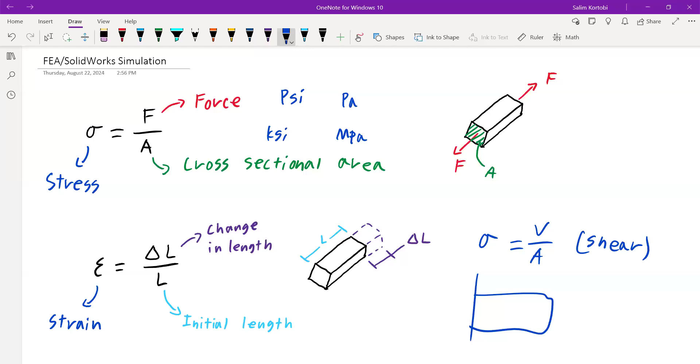For shear stress, a lot of times you'll see people write sigma equals F over A, or sometimes sigma equals V over A, capital V, where V is the shear force. So you might see it written this way for shear. But again, if you have a member like this and a force applying that's trying to shear it off something.

So another really important topic is strain. Again, this is one of the first things you learn in strength of materials. Strain is pretty much a representation of how much a body has deformed relative to its initial length.

So let's say we have this member, and you apply forces to it - it's going to elongate some amount. To calculate the strain, you take the initial length L, and the change in length, which is how much longer the material got, and divide that by the initial length, and it gives you the strain.

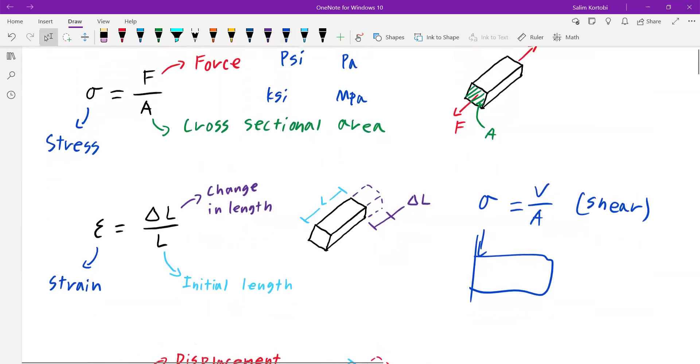That's a measure of what sometimes people call percent elongation, which can be derived from strain. Stress and strain are kind of related - I'll go into that a little bit later.

But a lot of times when you're designing or analyzing things, you don't really care about strain as much as you care about displacement. This formula here is pretty much the same as the strain one, except I switched L to X. X is usually what people represent as displacement. So displacement is delta X - pretty much how much this body has deformed.

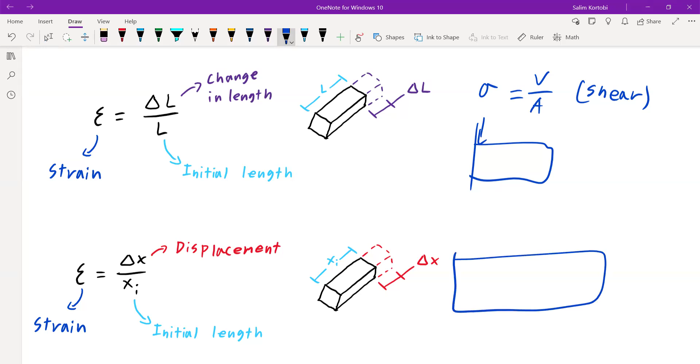When you're looking at deformation, you don't really care about the initial length. You just want to figure out, if I have this beam over my head, and I need a certain clearance to drive a machine through - if I have a thinner beam like this, and you put a big weight over it, that beam is eventually going to deflect to something like this.

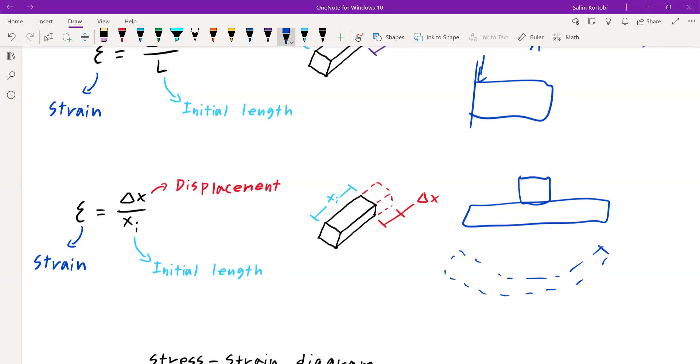Again, my drawing is not the best. So if you need to drive something underneath here, and you have a certain ceiling height, you may want to know how far this deflects. Because if it deflects, let's say, 3 feet, and you have 8-foot ceilings or something, you might end up with a clearance issue.

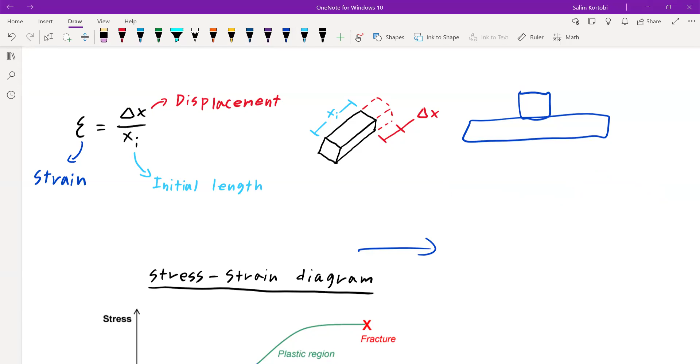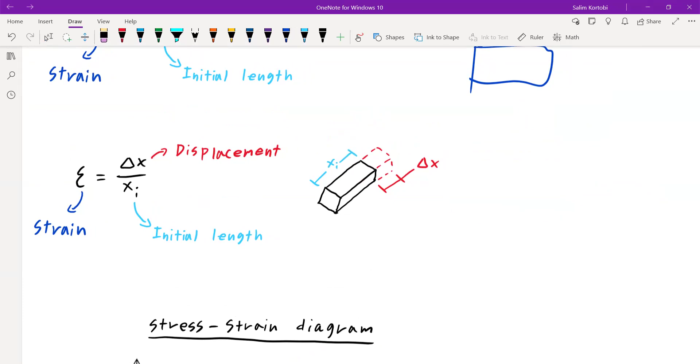So most times when you're designing stuff, you actually care more about displacement than strain. But displacement can be calculated from strain, and vice versa. The symbol for strain is the Greek letter epsilon - that's typically what you'll see for strain. This is normal strain, what I'm showing here, but there are other formulas for shear strain as well. I'm just trying to hit the high topics here.

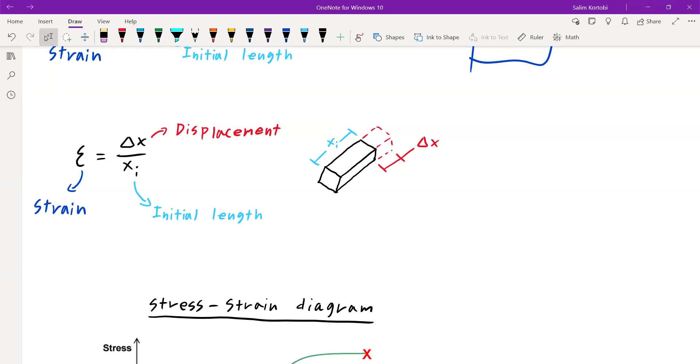I don't want to completely do an entire strength of materials class here. So these both go into - actually, before I go any further, does anybody have any questions about stress or strain or displacement?

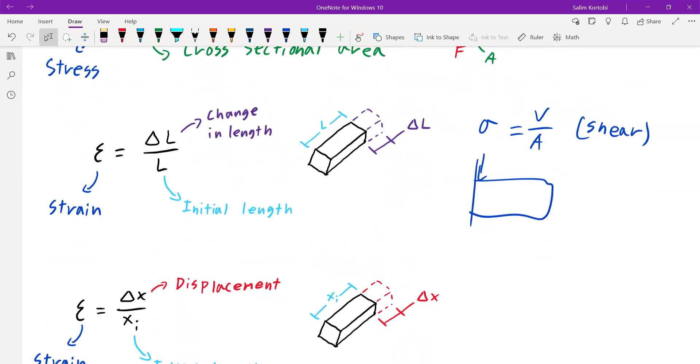So these are pretty much related, and in strength of materials, you probably spend a lot of time, or if you haven't taken it, you will spend a lot of time dealing with stress strain diagrams. So this is a stress strain diagram. I kind of like this diagram, it's a little bit simple. I actually found it from this research paper here.

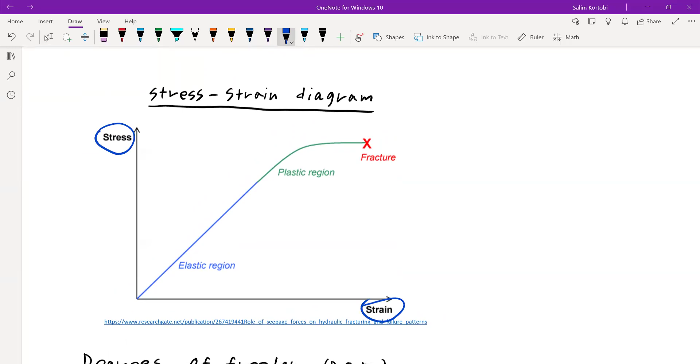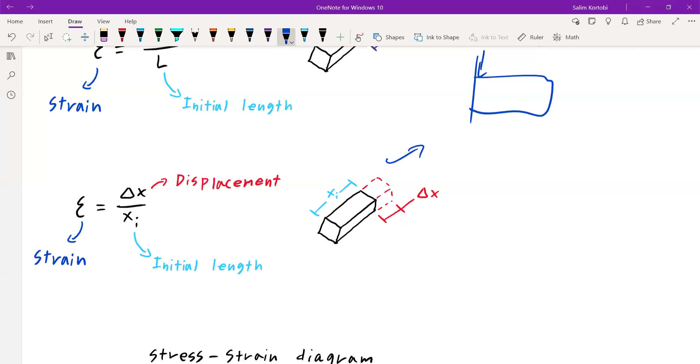When you're looking at a stress strain diagram, you're plotting on a graph the stress versus the strain. You've got strain on the x-axis and stress on the y-axis. As stress increases, the material is going to deform, so it's going to get longer and longer. The stress will keep going up until eventually it'll fracture, that's when the material will actually break.

But a region we're very interested in, especially in engineering, is this region right here. This is known as the linear elastic region, which means if you have a steel bar within this region, it pretty much acts as a spring. It acts as a very stiff spring, but you apply a force and it's going to elongate proportionally to the force applied.

So if you apply 100 pounds to a steel bar, let's say it expands by a thousandth of an inch. If you apply a 200-pound load, it should deform by two thousandths of an inch.

So it's linear. Also in the linear region, if you get the stress up to, let's say, here, and then relieve whatever force you're applying, that displacement will go all the way back to zero, so you won't really tell that anything has happened to that part.

Something actually changes though when you go above this point right here. This is what's called the yield point. That's when a material will actually yield, which means it's permanently deformed.

So what'll end up happening is if you put enough stress to get it up to maybe here, the material will go back some amount, but it'll end up here. So there's going to be some permanent deformation that you can't really get rid of by unapplying the force, if that makes sense. Again, this is probably pretty familiar from strength of materials, but as a good review.

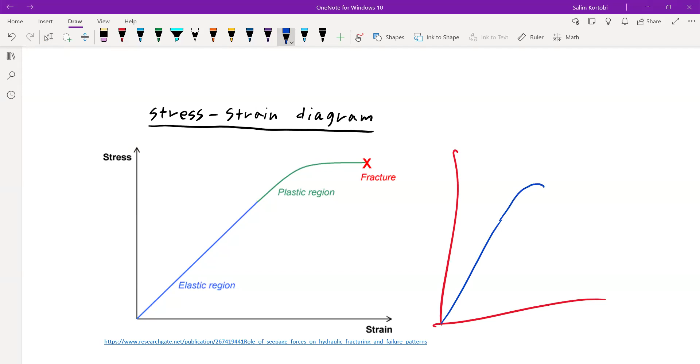If I draw another diagram with an offset, usually you'll have the linear elastic region, then it'll go into the plastic region after it's yielded. It might get up to a peak, then come down, and fail somewhere over here. There are some different regions in there.

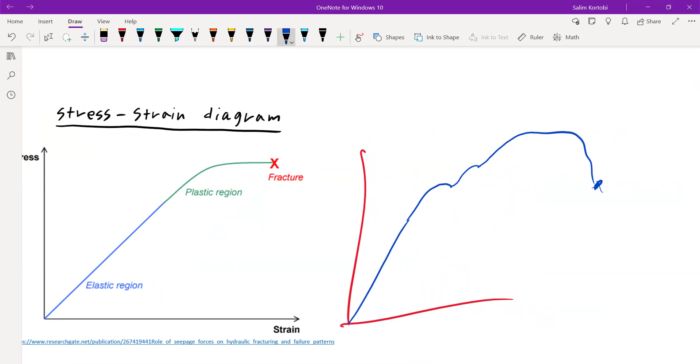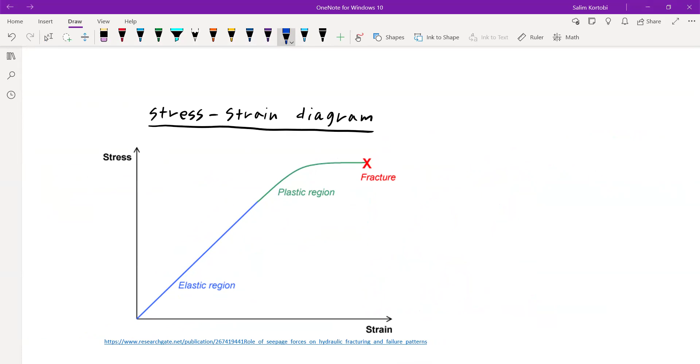You learn a lot of this in strength of materials or machine design. A lot of these things are good to know, but not 100% necessary to know how to run simulations. The elastic region though, and making sure the material we're working with is elastic, is a big one. If you're trying to analyze a material that's not elastic or has exceeded the yield stress, your results are not going to be accurate.

Okay, moving on. So degrees of freedom of a system. Well, actually, let's say a rigid body. So typically, if you have a body, let me try to sketch it out.

If you have a body, you've probably heard that there's 6 degrees of freedom, meaning that body can move in 3 directions: it can move in the X direction, the Y direction, and the Z direction, which would be in and out of the page. So those are the 3 translations. You also have 3 rotations: it can rotate about the Z axis, the Y axis, and the X axis. So those are your 6 degrees of freedom.

If you have a system made up of several links, each one could potentially have 6 degrees of freedom. Some of them may be restrained, but these are some of the things you have to look at when getting into simulation.

One thing I'll mention is a lot of what I'm going to get into now is specifically about SolidWorks simulation. Other FEA packages or simulation packages may be slightly different, so don't assume all of this applies to another simulation package. Most things like degrees of freedom are not really simulation specific, that's just more of a physical phenomenon.

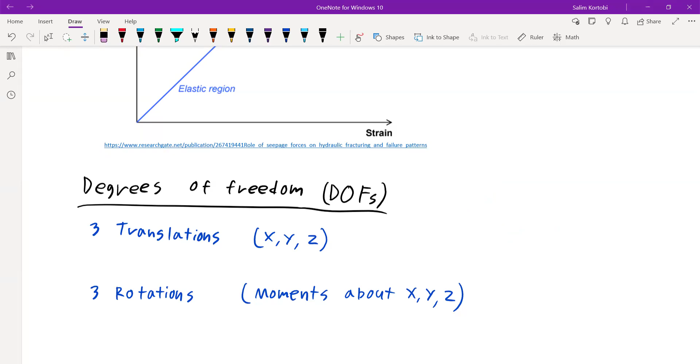So any questions about degrees of freedom? Okay.

This is kind of just a review from statics. Most of you probably already know this, but for some people who haven't taken statics or strength of materials, this will be a bit of an overview of some simple things that will help.

So for 2D, the fixed constraint limits all degrees of freedom. You're limiting a moment, limiting translation in the X direction, and limiting translation in the Y direction. For 3D, you're limiting all 3 translations, X, Y, and Z, and all 3 rotations: rotation about X, rotation about Y, rotation about Z, or moment about X, moment about Y, and moment about Z.

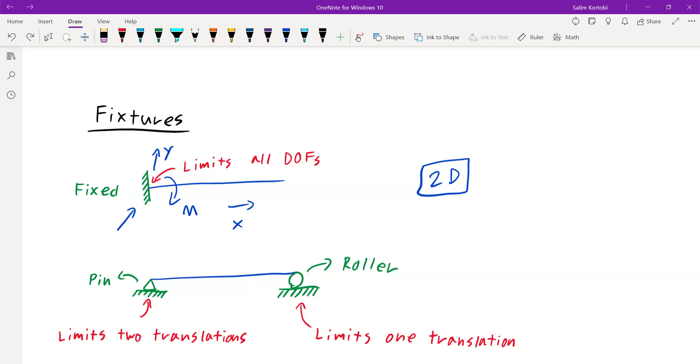It's going to be a little tricky for me to show 3D here, but when we get into SolidWorks simulation, probably the next session, I'll show exactly what we're looking at in 3D, because most of the things we're going to be analyzing is actually going to be useful when we're looking at 3D systems.

So the next one is going to be a pin constraint, shown here, usually drawn as a triangle shape. Sometimes you'll see it look like it's fixed on the bottom, but really the constraint we're looking at is the pin.

If you think of, let's say, you have a member like this, and you have a pin going through this hole here, this member can't move up. It can't move along the X or along the Y. It can only rotate about that pin. This is in 2D, and 3D is similar.

So this limits the two translations. This piece cannot move in the X, and it cannot move in the Y because it's a pin, and that's how you would show that. You'll see that a lot in strength of materials and statics.

A roller constraint will limit one translation. Think about having a wheel that's on the ground. Whatever is supported by the wheel is not going to be able to go into the ground, so it's preventing this member from hitting the ground. There'd be no translation in the Y, but it's free to move in the X, and it's also free to rotate, so the moment here is also unrestrained.

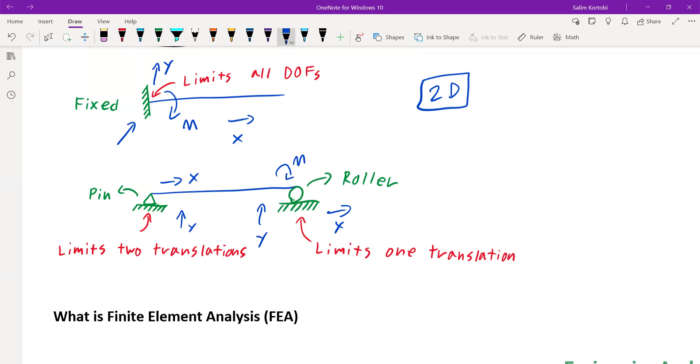Again, those are the simple ones. In simulation, pretty much all of the fixtures that we're going to be dealing with are going to be 3D fixtures or some variety of them, so I'll definitely talk about that more later.

Okay, so any questions about fixtures before I get into what is finite element analysis?

So what you'll do is analyze the forces, analyze how each one of these is deforming - how is it moving, how is it deflecting. And when it figures that out about all these different elements...

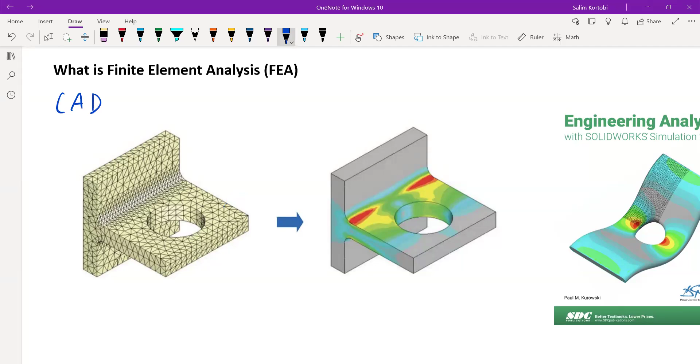You'll also hear some people call this - you're probably all familiar with the term CAD, computer aided design. Usually what happens is CAD will go to what's called CAE, which means computer aided engineering, which is pretty much analysis like this, FEA type of stuff.

Then what usually happens after that is when you want to actually fabricate your part, you'll put it into what's called CAM, computer aided manufacturing. For mechanical engineers, depending where you're working, you may or may not deal with CAM at all - they don't teach that in the mechanical engineering degree, but METs do teach CAM because they do a lot of machining work. So that's the process - typically in the design process it goes from CAD to CAE, then it may go back to CAD.

You make a modification, then it goes back to CAE, or simulation, and then you keep going round and round until you get a part you're actually happy with. You can change the material, make sure you have the right material, make sure you're getting the stress you want, and stuff like that. Any questions about FEA in general or anything I've just talked about?

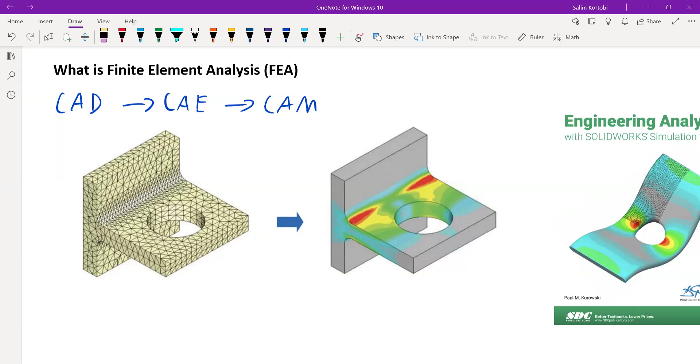Okay, so next I'm going to talk a little bit about elements. There are different types of elements. These that we looked at earlier are what are called solid elements.

A solid element looks something like this - it's what's called a tetrahedron. So it has four faces: one face, two faces, three faces in the back, and then a face at the bottom. It's pretty much a triangular pyramid with a triangular base.

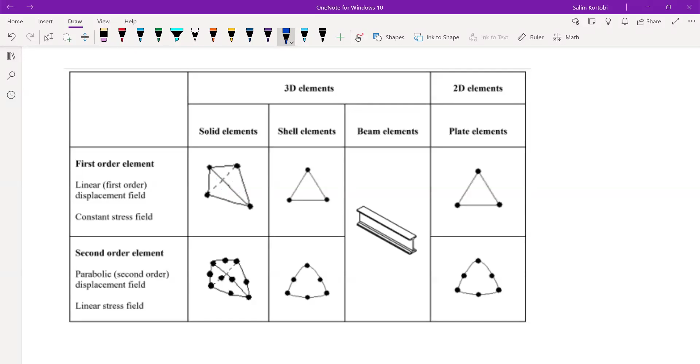That's usually used for parts that are relatively thick, kind of like this. You can see that you can fit quite a few elements in there. There are also something called shell elements, which are kind of a 2D element.

It's technically still 3D because it can deflect in 3 dimensions, but geometrically, when you start out, it is just a triangle. So typically what that'll do is if you have a very thin part, like this, and you're applying, let's say, maybe a thin sheet metal something, and you're applying a force.

What you can do is treat this as a shell, and have all these little triangles treat all of the sides as little triangles instead of solid elements.

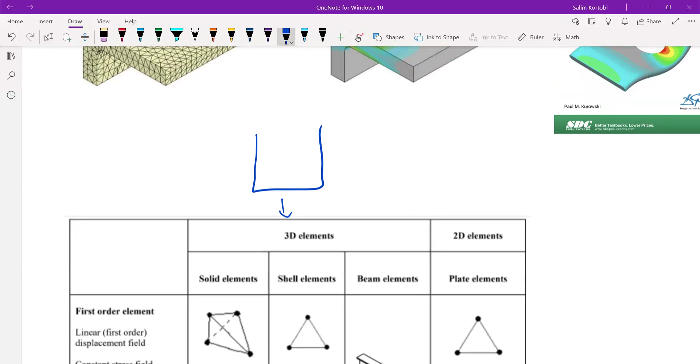The reason for this is a lot of times the more elements you have in a model will dramatically increase the time it takes to actually run the analysis. So shell elements typically are a way to simplify. It may not be as accurate as a very fine solid element, but it saves a lot of time, and usually the accuracy is close enough for most applications.

So it's worth having the time savings and also the computational resource savings to not have to run a simulation for, I don't know, 10 hours to get an answer that's within maybe 5% or 3% of when you're using shell elements, which might take an hour instead. Again, those numbers are just off the top of my head - it depends on the part, and on a lot of different factors.

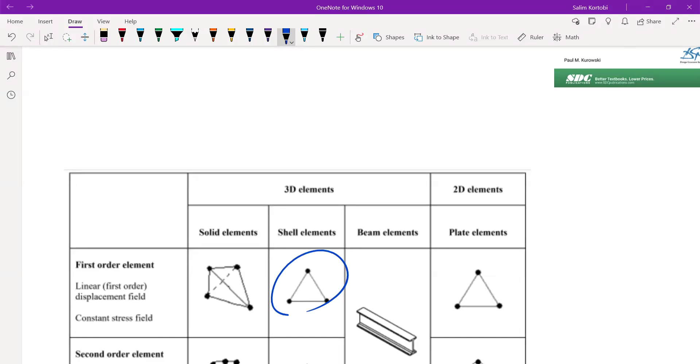Another type of element is what's known as beam elements, something like this. A beam element is pretty much when you have a beam that has a constant cross section, kind of like this I-beam.

What you can actually do with a beam element is, again, in research here, we're probably not going to - we may or may not use beam elements. I'm thinking we probably won't, but if we do, I can definitely go into more depth on those at a later date.

But pretty much a beam element is treated kind of like a line, and you have usually a node on each end, and in some cases also a node in the middle, depending on the order of the element and stuff like that.

So when you're dealing with beam elements, it's kind of like calculating forces on a line, and then simulation will actually go back in and do the I-beam cross section after the fact, kind of. I wouldn't say after the fact - it's all part of the analysis, but you don't really see the actual cross section, though it is accounted for in simulation.

So it's another way to simplify instead of having to use a ton of very fine solid elements or a lot of them. When you have a constant cross section, a beam element is another way to simplify elements, and simplify the calculations that you need to do.

There are 2D elements as well. You can also run just 2D simulations, which are a lot more simple than 3D. Typically these are used in very specific cases where you only have forces in two directions, versus if you have a component or structure that's deforming in three different directions, or in 3D.

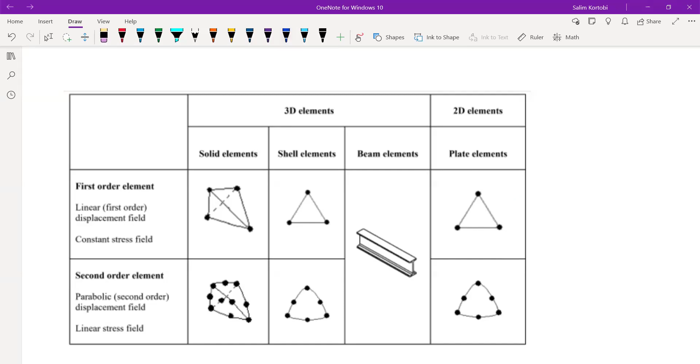So again, we probably won't deal with a lot of this either, but just so you know it exists. One thing in SolidWorks that you definitely want to know: there is a distinction between first order elements and second order elements.

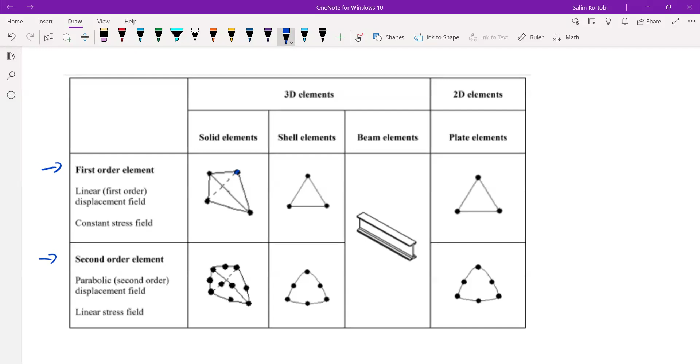Pretty much what that means is for solid elements, a first order element has a node at each corner. So node here, node here, node here. A regular tetrahedral solid element will have 4 nodes, one at each corner.

What happens if you go to a second order element? It's still a tetrahedral element, but not only do you have 4 nodes, one at each corner, you also have a node in the middle of each segment. This allows the model to not only figure out the displacement and properties at each corner, but this line here can also now deflect, and you'll end up with a parabolic kind of displacement. This is a lot more accurate than the first order version.

In SolidWorks specifically, you sometimes won't actually see the term first order and second order element. What you will see is something called draft quality. Draft quality designates a first order element, and high quality designates a second order element.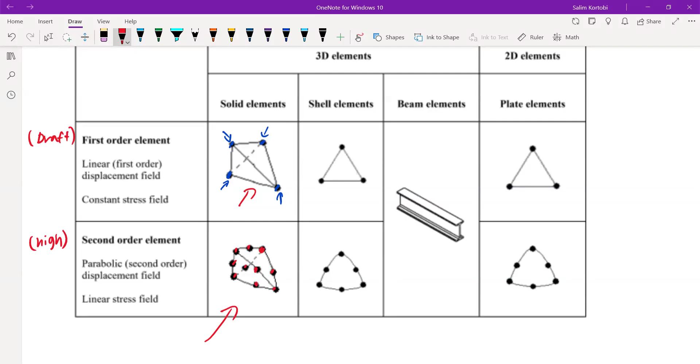Typically, you always want to use second order elements. You don't want to use first order elements unless you're just trying to check something. The exception is, let's say you put all your fixtures and forces in place, and you're just trying to figure out how the actual body behaves. So let's say you've got a rod.

Let's say you have a rod in tension. It's fixed on this face, and you're pulling on it there, and you want to see does this actually behave the way I think? Obviously it should extend, something like that. So draft quality is good for that. You don't really care what the exact results are, you're just trying to see if the deformation, the behavior of this model, is actually what you're expecting.

Sometimes you can use draft quality because it saves time just to see, okay, am I getting the behavior I'm expecting? If you are, you can go back and switch it to high quality. If you're not, you have to go back and look at your fixtures and forces to make sure everything is set up properly, or you might have to change some things. But when you're actually doing calculations or simulations, not just checking your setup, you definitely want to use high quality, or second order elements.

Similar thing here for shell elements, a node at each corner. Again, you have a node at each corner and a node at the midpoint of each line, and these can actually deflect in a parabolic deflection. Some of this also applies to beam elements and 2D elements as well.

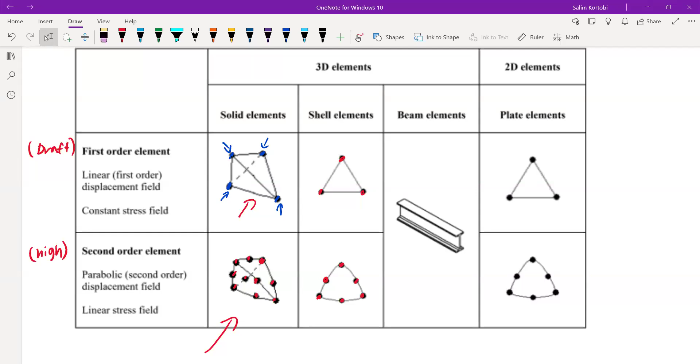Again, a lot of this stuff you won't necessarily see when you're in simulation, but you obviously want to know what you're dealing with, because if you're running all of your things as draft quality, your results are probably not going to be that accurate, although you won't really be able to tell unless you actually look closely. Then all of a sudden, maybe somebody else runs a simulation and they're getting very different values from what you're getting, enough different that there's cause for concern. That's definitely something you want to have in the back of your head while actually setting up and running simulations.

I will talk here a little bit about the difference. All of you are probably familiar with CAD and some things.

You may or may not be familiar with SolidWorks, but CAD typically functions similarly between packages. When you design a part, as long as you get the desired thing, the right shape, the right sizes or dimensions, that's pretty much all you really care about. That's pretty much your goal in CAD: to get a design that looks like what you want it to.

So for simulation, or FEA in general, it's not as straightforward. When you're designing a part, you don't necessarily care exactly how SolidWorks is doing a revolve feature, all the calculus and math that goes on behind it. Some people do, and it's great to know how it works, but beyond curiosity, it doesn't impact your job as a designer to know it's using this partial differential equation or some topic from calculus 3 or 4.

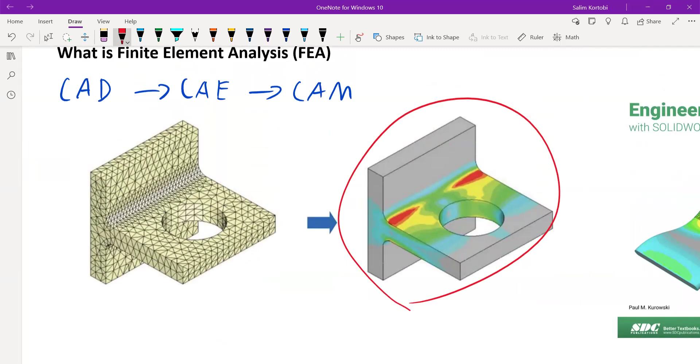It'll usually have a plot that looks something similar to this. I'm going to have some examples at the end so you can see exactly what the interface in SolidWorks actually looks like - it's like this but a little different, this is more of a simplified version. It's going to give you this nice pretty picture with all the colors and everything.

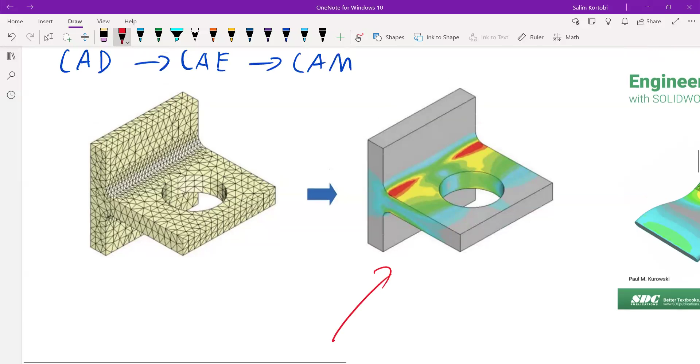The tricky part of simulation is that, unless it errors out for some reason - which can happen, usually because you didn't set it up right, and at least then there's a problem - a lot of times you'll get this output, and the engineering part is making sure the picture it gives you is actually representative of what you're dealing with in real life. Just because this nice pretty picture shows up on the computer doesn't necessarily mean the actual part is even set up correctly. You might have different fixtures or different conditions in real life than what you put into SolidWorks, and it's still going to give you an output.

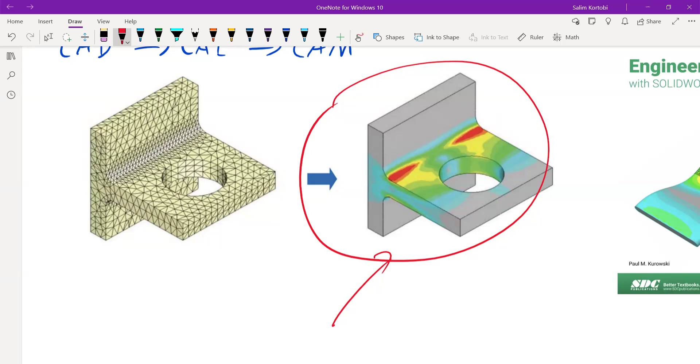So it's pretty much like on an exam: you put your long formula into your calculator, and say you forget and instead of putting in 355x, you put in 55x. Obviously your answer is not going to be anywhere close to the actual correct answer.

That's why with simulation, it's very important to know at least a basic understanding of what happens on the back end, what elements are, and things like that. That's a lot more important than with CAD, where if you get the part with the right shape, you're kind of happy. With simulation, you not only want it to look nice and have the correct parameters, but you also want to make sure the results are actually accurate, because that's literally the whole point of simulation - to predict real life behavior of parts.

So if you're not getting an accurate prediction, simulation is really not helping you very much.

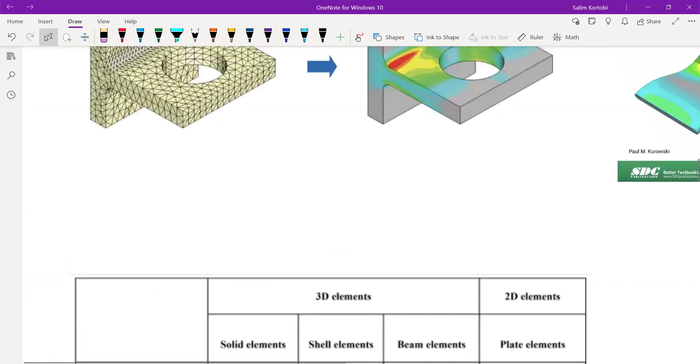One thing I'll talk about with solid elements: when you look at a thing, one thing you'll look at is how many elements are across, across the thickness, some people will call this. So if you look here, there's actually 3 elements. There's 1, I'll try to put these in different colors. There's 2, and there's 3. There's 3 different elements across.

For solid elements, you typically want a minimum of at least 2 elements across the thickness. Ideally, you usually want 4 to 5 if you can. So element size, you can obviously shrink the element size if you need more elements across. Again, what will end up happening is that's going to make a lot more elements, and it's going to make your simulation longer. But you do want to have a reasonably accurate simulation.

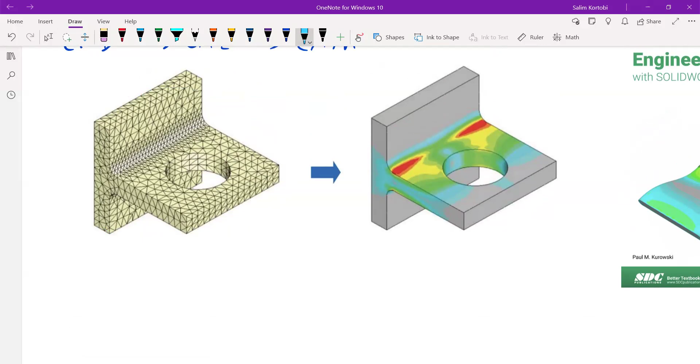Another method you'll sometimes see people use, a bit off topic here, is they'll run a simulation with a more coarse mesh, something like this, and then they'll run another one with a very fine mesh, with a lot more elements. They're trying to get an idea: is this even in the ballpark, or is this part just going to automatically fail? And if they're getting numbers they're happy with, they'll run something a lot finer and say, let's really look at this and get a much higher level of accuracy. Because the more elements you have generally means you get a lot more accurate prediction, especially when you're dealing with regions that are curved.

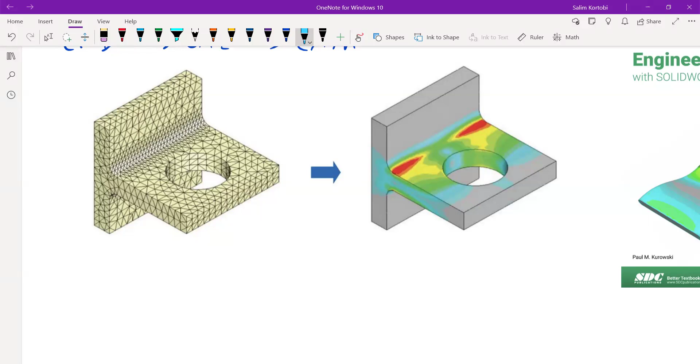You can see some mesh types are different - there are different ways to mesh in SolidWorks, not just elements. There are things called curvature-based meshes. When you have a curved surface, it'll try to make a finer mesh on that surface, or along that curve or fillet. So when you have features that are changing rapidly, you definitely want to try to get a finer mesh in there.

Any questions about anything so far?

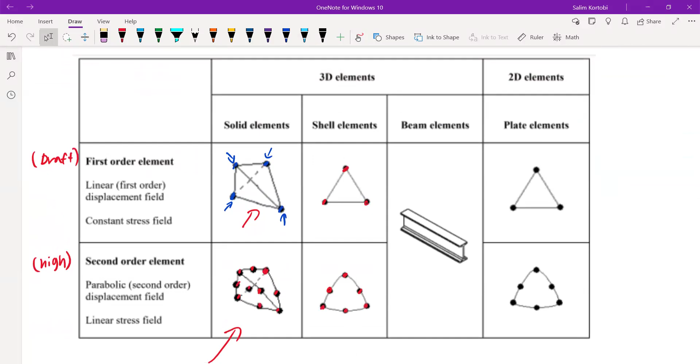Okay, so moving on, failure theories. If you've taken machine design, you're probably familiar with at least a couple of these. Again, it's not really important to know exactly how these are calculated - you can look these up, and there are formulas for how they're all calculated.

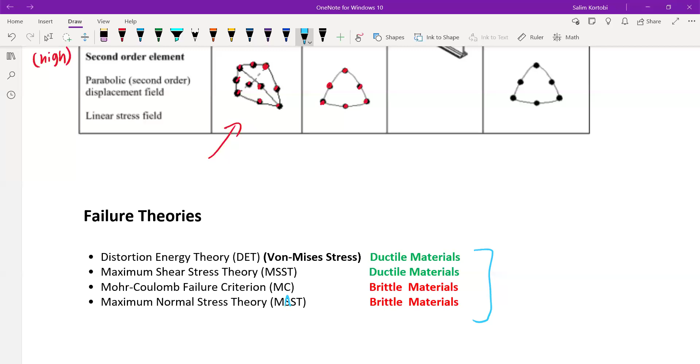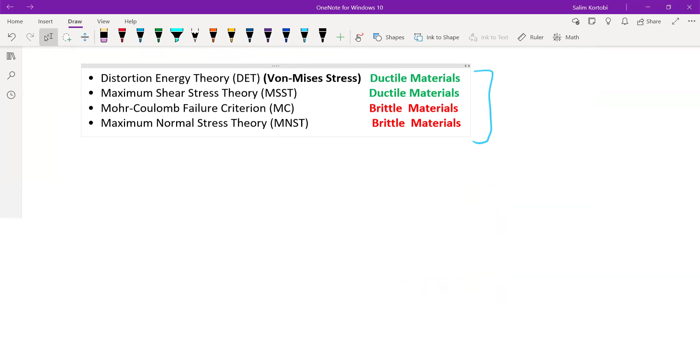SolidWorks predominantly uses four failure theories, not necessarily defaults, but these four: distortion energy theory, maximum shear stress theory, Mohr-Coulomb failure criterion, and maximum normal stress theory - this should be an N, that's a typo on my side, let me see if I can fix that. Sometimes you'll see different abbreviations as well - that should be MNST.

For anyone taking machine design, you're probably familiar with these two especially, or if you're a grad student who's taken applied engineering design, I think that's the class name. You probably know DET and MSST. DET is the same thing as von Mises stress, so in SolidWorks a lot of times you'll see von Mises stress, which is using DET - that's the more common term for it.

These two are meant for ductile materials, while Mohr-Coulomb and maximum normal stress are for brittle materials. Different materials, like if you're dealing with glass or something like that, that's not really a ductile material.

What I mean by ductile versus brittle - like we were talking about earlier, let me switch colors here. When you have a stress-strain curve, you're going to have that linear elastic portion, and then you're going to have a yield point, and then it'll do whatever else. A ductile material is going to have a designated yield point, so there's a point where it'll yield.

Brittle materials don't really have a yield point. They get to a certain point and then just break. It's not a slow failure, it's going to just snap, like a bolt. Some bolts are very hardened, so they're very strong, but they're not going to give any warning before they go. They just pop. So brittle materials and ductile materials behave in different ways.

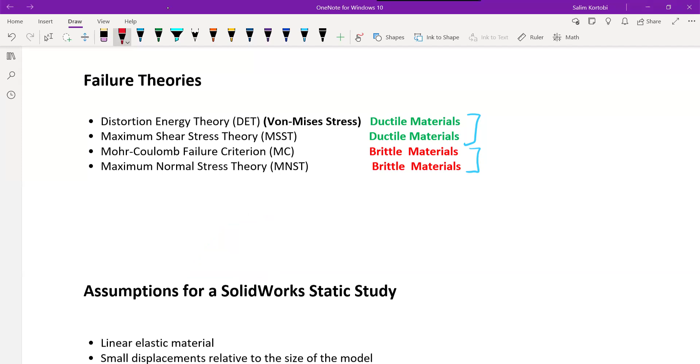Okay, so next, assumptions. What I'm going to start talking about is that in SolidWorks there are different types of studies you can run. A study is pretty much a setup, the simulation we're running.

The first and most common is a SolidWorks static study. From statics, you don't have any motion and such. I'm going to go through these assumptions because they're very important. This wasn't really taught in my CAE class, maybe different professors teach different things, but this is some of the stuff you need to know for the associate certification, CSWA-S for simulation, regarding the assumptions.

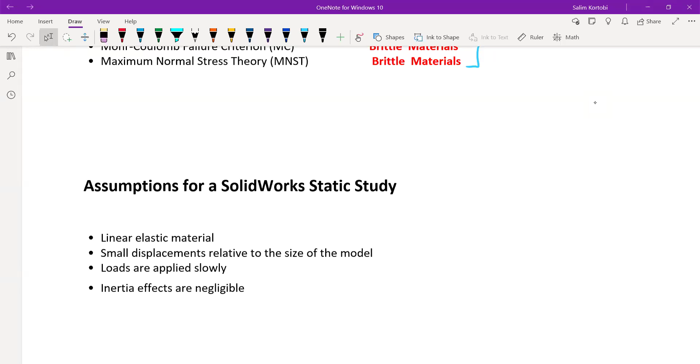Before I go into the assumptions for a static study, you have two general categories for studies: static on one end, and dynamic on the other. So from statics, or dynamics versus static - in static, the structure is not moving.

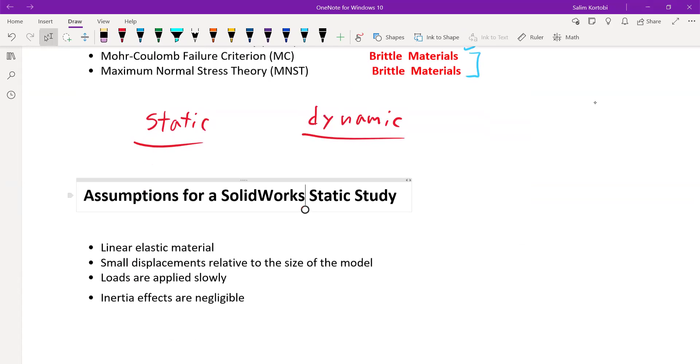You can assume that the sum of all forces is equal to zero. In statics, the big equation a lot of people use is sigma F equal to zero, and sigma M, the sum of moments, is equal to zero. Those are the big two for static.

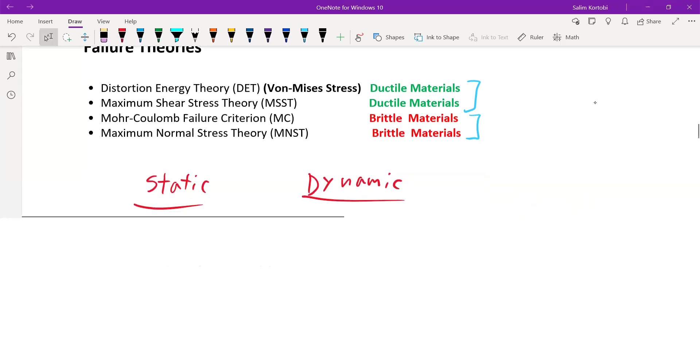For dynamic, it's not necessarily true that the sum of forces or sum of moments is equal to zero - the structure may be moving, like a car. So the forces may not necessarily sum to zero.

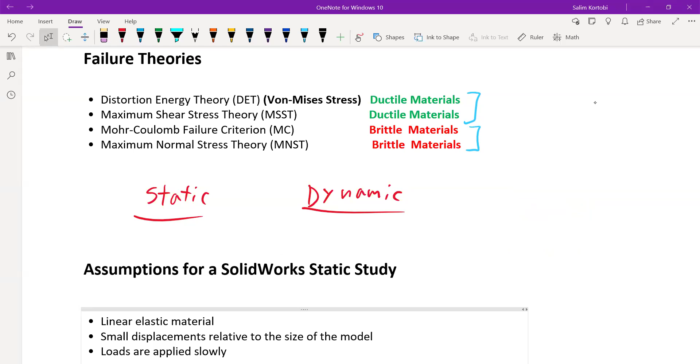There's a subcategory under static and dynamic - these are the main ones. Under both static and dynamic, you have what's called a linear study and a nonlinear study. This is the same for dynamic as well.

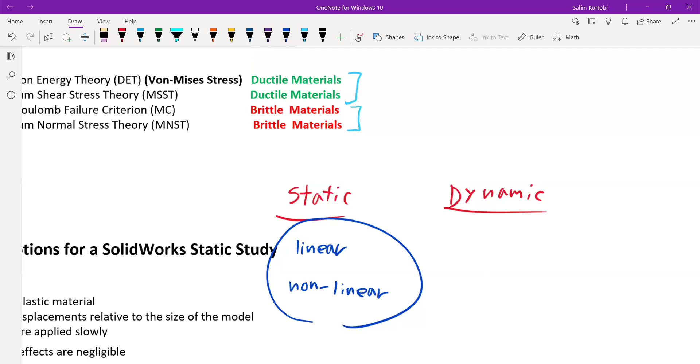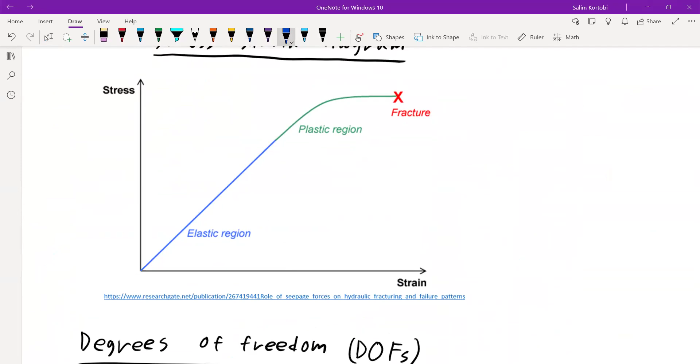So what does linear mean? We talked about this a little earlier - going back to the stress strain curve, you're assuming the material is elastic and behaving linearly, within that region. That's a big assumption. If you're dealing with a material that's not linear, or a linear elastic material that has exceeded yield strength, then it's now behaving non-linearly.

So you can't just assume that if you apply double the force, you'll have double the displacement - that assumption is no longer correct. The same thing happens for dynamic. Nonlinear adds an extra level of complexity.

There are different levels of SolidWorks simulation. The first is just SolidWorks Simulation, the standard one, which usually just does static studies - and when I say static, I mean regular static linear studies, not nonlinear. Then you can go up to SolidWorks Simulation Professional, which has some thermal capabilities, and a bit of dynamic simulations.

And then you have SolidWorks Simulation Premium, which again this is an overview, but you can go online and actually see all the comparison between the three. You'll end up with nonlinear type things - nonlinear dynamic, nonlinear static. Especially if you're in the workplace, simulation can be very pricey, especially simulation premium - it runs quite a bit of money.

So a lot of times people don't necessarily need premium if they're only running static studies for linear materials. That's one thing to keep in mind. Obviously for students, with our student edition, we have pretty much simulation premium, the student version of it. So we have the ability to run static, dynamic, or nonlinear of any variety, as well as thermal and a whole bunch of other stuff.

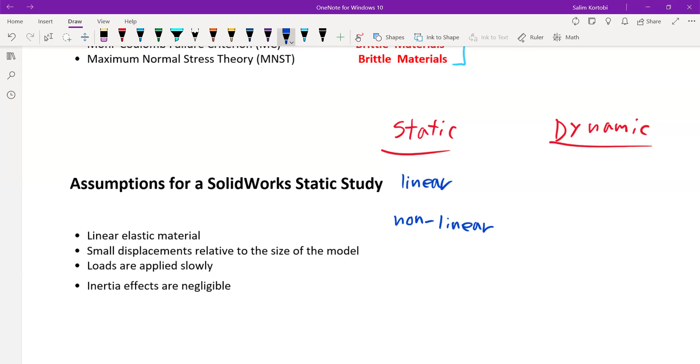Another one that's not necessarily as well taught is small displacements - meaning small displacements relative to the size of the model. So let's say if you have this huge I-beam that supports a bridge or something, and you apply your force and it deflects 0.0001 millimeters or something - that displacement relative to the size of the model is very, very small.

So that's another assumption. Let's say you have this tiny little pin put in some sort of hole, and you apply your forces, and assuming it stays linear and doesn't permanently deform, let's say this pin is 1 inch long, and it deflects - let's assume it stays linear, these numbers aren't realistic - let's say it deforms a quarter of an inch. So now you have a pin, and now it's like that type of thing.

And there are certain values - SolidWorks simulation will actually give you a warning if it thinks your displacements are too large relative to the model. A lot of times people get that message: 'We're detecting large displacements, do you want to run it?' Because there is a thing in SolidWorks simulation - you can do this in a static study - to treat it using a large displacement model versus a displacement model that's meant more for small displacements.

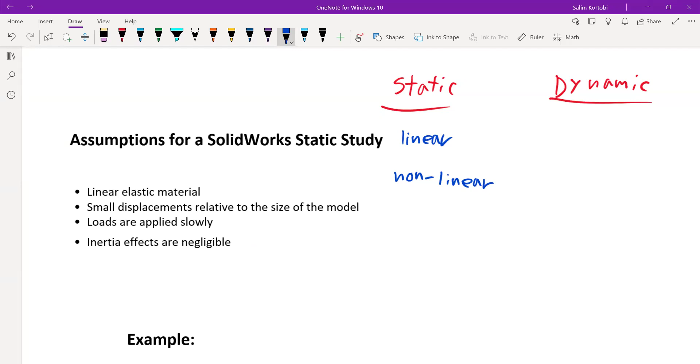Okay, so I'm now going to get into an example, and from now on I'm going to go back and forth with you all. This is generally what your study is going to look like in SolidWorks simulation. I'm going to start asking for feedback and testing you based on what I've talked about - are these results accurate, or can we expect them to be accurate?

So here's a part, just a quick part I whipped up in SolidWorks. The material is plain carbon steel. I'm applying a force - the little purple arrows in SolidWorks simulation designate a force or a load. All these colors can be customized, but this is the default that most people use. The little green things are done for fixtures. So this entire back face, from the backside, is completely fixed, meaning 0 degrees of freedom, and there's a load applied to this face.

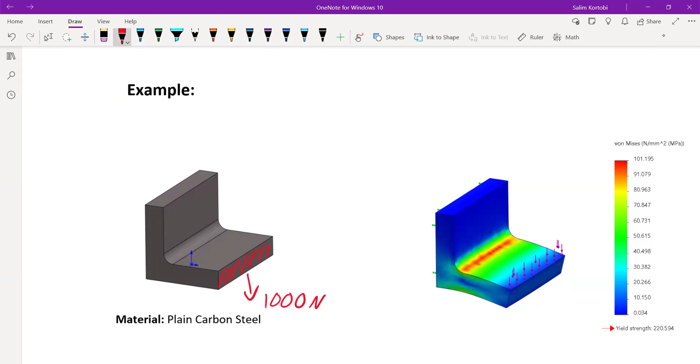There's a load applied to that face right there in the down direction - I believe it's 1,000 newtons. And the back face here, this entire face, is fixed.

Okay, so you have that fixed. When you're going to do that, I'll get into the process once we get into SolidWorks, probably the next session, because I'm coming up on about an hour and don't want to hold you guys up too long.

So you're going to, once you apply everything, you set it up. I'm not going to go into the setup right now. Once I get into SolidWorks, it'll probably make a lot more sense.

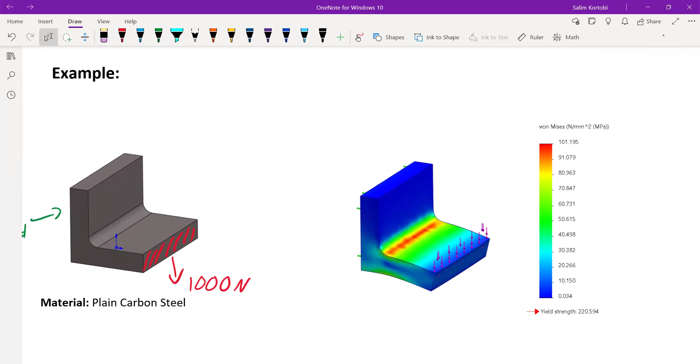You're going to get a result. This is kind of what you would expect from a results plot. This is a stress plot, obviously in von Mises stress. It tells you the units, newtons per millimeter squared, which is megapascals.

So based on everything, and again, if anybody hasn't - so you guys tell me, do you think these are accurate results? Yes or no? If anybody hasn't taken strength of materials yet, or CAE for that matter, I'll let them answer first because I'm curious. If anybody hasn't taken either one of those, then I'll open it up to everybody. So do you think these results are accurate? Yes or no, and if so or if not, why?

I took CAE like 8 years ago, okay, but right now I forgot a lot. But looking at this simulation, I would say yes, it's fairly accurate.

Okay, with von Mises, of course, simulation can only do so much. But I don't know what kind of elements, is it tetrahedral or linear shapes that you're using? These are tetrahedral solid elements, I should have mentioned that.

Okay, yeah, well the more fine it is, the more accurate it will be. But yeah, for this case it's fairly accurate. It looks like just angle iron with a load on the end of it.

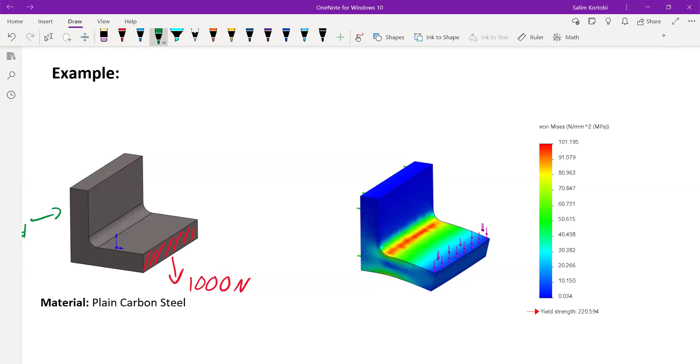So factor of safety, or FOS as most people say, FOS is equal to sigma. In most cases it's going to be - I'll put failure, because it depends on what you're trying to do - the failure stress over the actual stress.

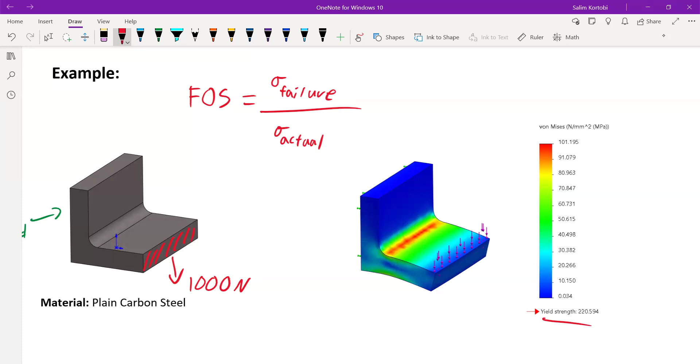So in this case, the failure stress, in most design applications, is going to be the yield strength. Most people don't want their part to just break. You design against yield, because if you remember the stress-strain curve, there's usually quite a bit of room after yield, before a ductile material breaks. So all your factors of safety are based against yield, not ultimate - you just don't want the thing to break on somebody's head. So obviously you'd want to design against yield, so in this case it's the yield.

So in this case, you have a yield strength of, let's say, 220 - oh sorry, oopsies. You have a yield strength of 220, and you're going to have a failure... actually I had it right the first time, you've got failure of 220 megapascals.

And I'm going to try to wrap up here in the next 5 or 10 minutes because I don't want to keep you guys too long. 220, and then you have an actual stress of, say, 101.

So when you do that, you're going to have a factor of safety of over 2, which means you can apply more than double the load before the actual thing will break or fail in this case, in yield. This has not exceeded the yield, so it's not nonlinear in this case. So this would be a correct result.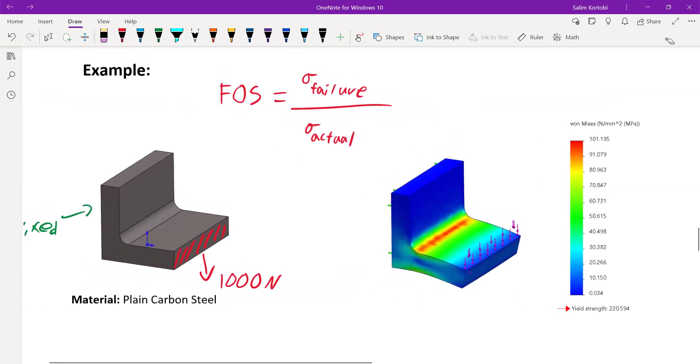Another question. Let's say we have the exact same part, exact same loading, exact same everything else, but instead of plain carbon steel, we have gray cast iron. What do y'all think about these results? Let's say the load might change, but let's just say hypothetically these are the same exact results.

Anybody? I would think that it's inaccurate. Okay, because why? Because of how much more brittle it is. Yeah, based on your failure theories that you showed previously. Very, very good. So yes, that is something to check.

So typically for SolidWorks, when you're dealing with materials, it will have a default failure theory if it knows it's a brittle material or a ductile material. So it typically will pick the right failure theory. The issue is when you're doing a simulation and the material you're trying to use is maybe not one of the default materials in SolidWorks.

So you go to a website and find the material properties. A really good website is called MatWeb. I believe it's free, you might need to set up a free account, but they have thousands, probably hundreds of thousands of materials and all of their material properties. You can take those properties and import them into SolidWorks, either by creating a new material, or I think there's also a way to download a preset.

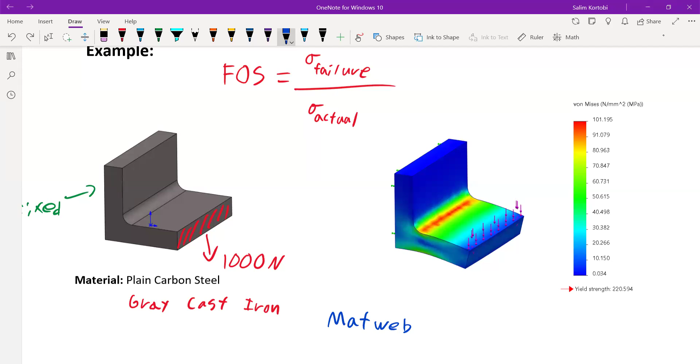Okay, so here's that. Let me scroll down here. Any questions about that?

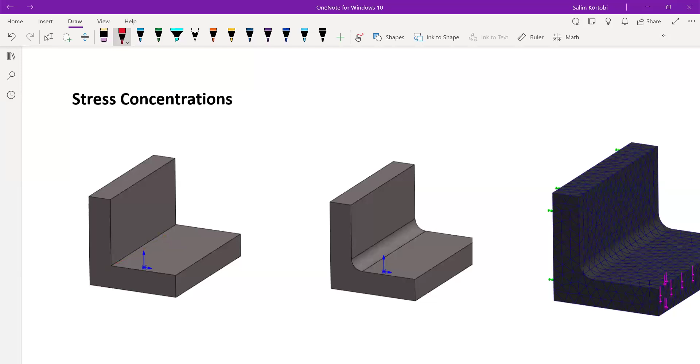Okay, so here's stress concentrations. This is a big one. When you have a sharp corner like this, you end up getting what's called a stress concentration, an artificially high stress in that region. The finer you make the mesh, the elements keep getting smaller and smaller, and the stress in the corner will actually shoot up to infinity, which isn't really accurate, but theoretically the force is the same. If you remember, stress equals force over area, so technically the force is the same, but with smaller and smaller elements, the area is going to zero, getting smaller and smaller, so you end up making the stress pretty much infinity.

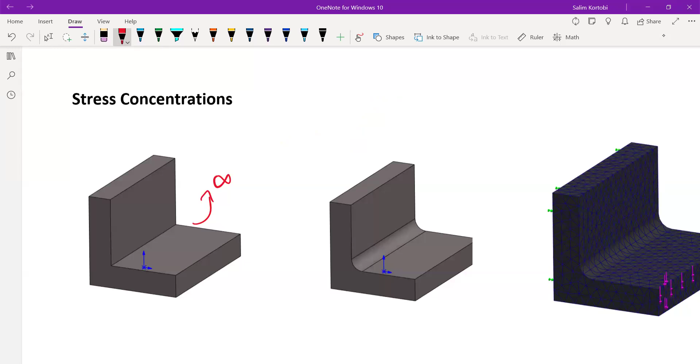So most parts, you don't want to have a sharp corner like that. That's why a lot of times you'll see fillets and stuff like that to relieve that.

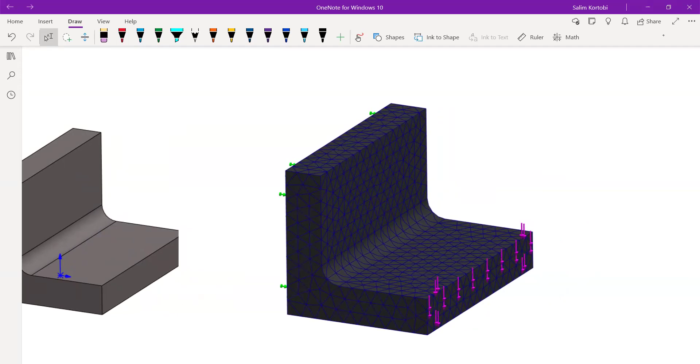Okay, so from there, if you run a study, this is what you're looking at. This is the same exact study from before, but this one is without the fillet. It's just a sharp edge.

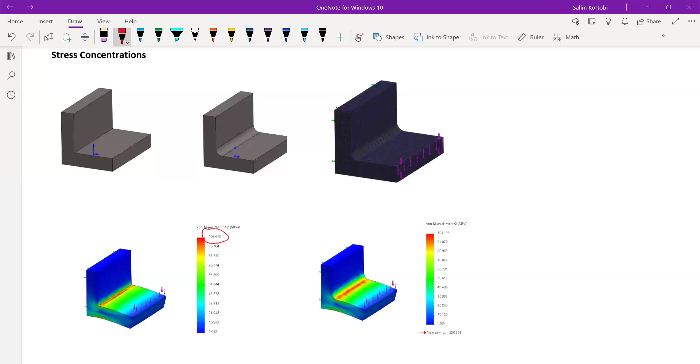So look at our max stress here. Max stress is about 110 megapascals. For the one with the fillet, with the same mesh size, you're at about 101. So there's not a huge difference here, but it is still noticeable.

But watch when I go to a much finer mesh. Let me really zoom in here. See, that's a much, much finer mesh—you can see how many elements are across there.

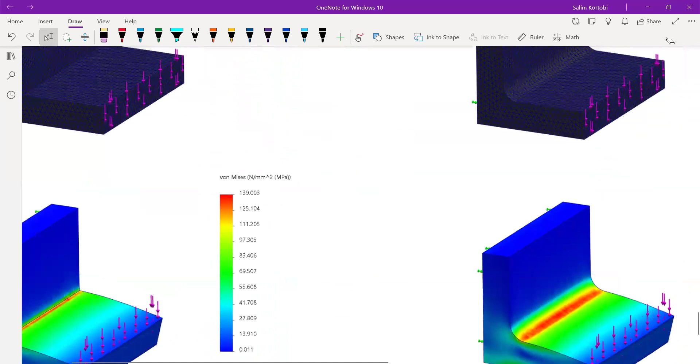So when I go to a much finer mesh, now we just went up to 139. And when we do the finer mesh for this one, which looks something like that, you end up with a von Mises of 108. So 108 from 101, this didn't change that much—it went up by about 7. From this one though, it went up by about 30.

What will end up happening is the finer you make the mesh, this is going to keep going up and up and up. So you'll have a difference between your stress and your element size as your element size gets smaller. Typically, if you have a graph, let me try to sketch that.

I'm almost done, I promise. So let's say this axis is stress, and this is element size—let's call it size.

What will end up happening is as the element size gets smaller, it should plateau out. The finer you make it, eventually it's not going to change that much—it changes less and less. That's if you have a situation like this.

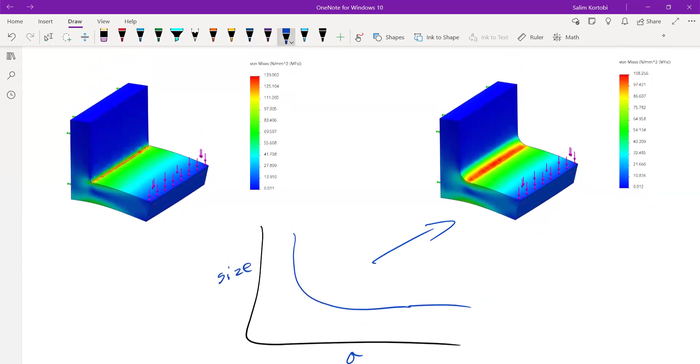If you have a situation more like this, what'll end up happening as the size gets smaller... no, I think I actually drew that graph wrong. So ignore that.

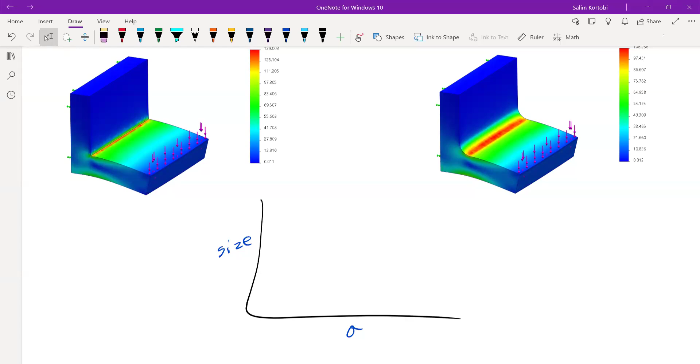But pretty much what will happen is the stress will end up going up toward infinity. The smaller you make the mesh, it keeps going up and up and up until you have this—now you almost have an infinite stress, which is obviously not accurate. Whereas something like this, the stress will actually plateau out eventually, if that makes sense.

And that's pretty much all I have. But any questions about anything?

Kevin's asked a couple questions. Somebody else needs to compete with Kevin.

I don't know enough yet to ask good questions. That's good—you're good, I know that's definitely understandable.

I know it's a lot of information, definitely a lot to go over. Again, that's why everything is recorded. Is there anything that didn't make sense? Maybe that's a better question—is there anything that didn't make sense that I should go over again?

Everything was great for me. I just took strength of materials this past spring. So yeah, you probably have an idea, a lot of the stuff was probably reviewed. The FEA part was probably new, but stress and strain, you probably remember that quite a bit.

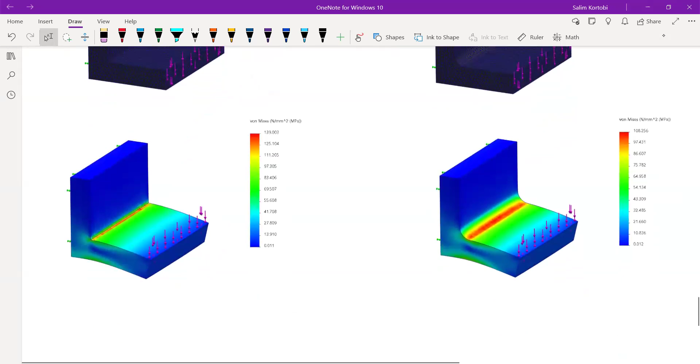So yeah, let's see if there's anything else. I think I covered a pretty good overview of linear study, or linear static studies, in SolidWorks.

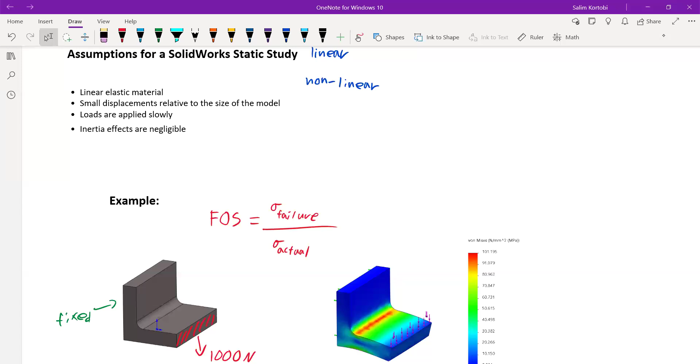Next session, I plan to really jump into SolidWorks and start showing how to set these things up, and what some of the pitfalls are when dealing with fixtures and loads and stuff like that.